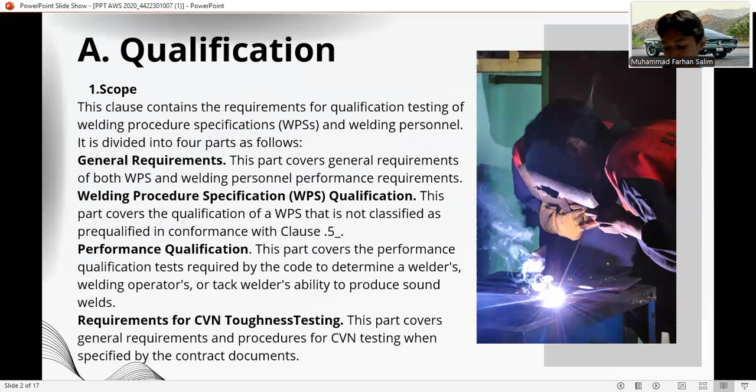And the last is requirements for CVN toughness testing. This part covers the general requirements and procedures for CVN testing when specified by the contract documents. And B is general requirements.

In general requirements, we have one, general: the requirements for qualification testing of WPS and welding personnel, defined as welders, welding operators, and tack welders, are described in this section. In this section, there is one, welding procedure specification or WPS. Except for prequalified WPS conforming to the requirements of clause 5, WPS for use in production welding shall be qualified in conformance with clause Q, part B. Properly documented evidence of previous WPS qualification may be used.

2. Qualification responsibility. Each manufacturer or contractor shall conduct the tests required by this code to qualify the WPS. Properly documented WPS qualified under the provisions of this code by a company that later has a name change due to voluntary action or consolidation with a parent company may utilize the new name on its WPS documents while maintaining the supporting PQR qualification records with the old company name.

3. WPS qualification to other standards. The acceptability of qualification to other standards is the engineer's responsibility, to be exercised based upon either the specific structure or service conditions or both. AWS B2.1 series on standard welding procedure specifications may, in this manner, be accepted for use in this code.

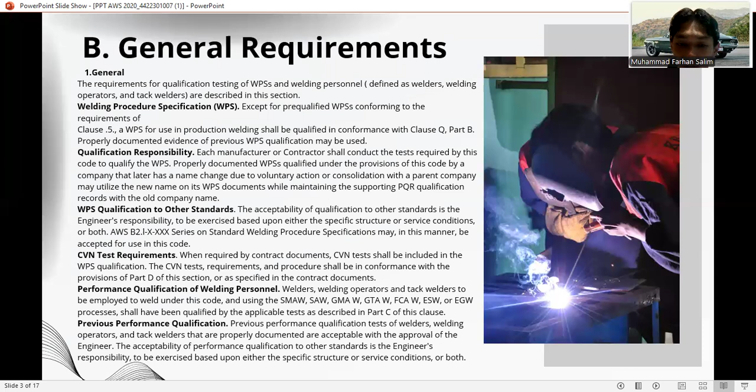And last is performance qualification. Previous performance qualification tests of welders, welding operators, and tack welders that are properly documented are acceptable with the approval of the engineer. The acceptability of performance qualification to other standards is the engineer's responsibility, to be exercised based upon either the specific structure or service conditions or both.

There is two, qualification responsibility. Each manufacturer or contractor shall be responsible for the qualification of welders, welding operators, and tack welders, whether the qualification is conducted by the manufacturer, contractor, or independent testing agency. 2. Common requirements of WPS and welding personnel performance qualification.

There is qualification to earlier editions. Qualifications performed to and having met requirements of earlier editions of AWS D1.1 or AWS D1.0 or AWS D2.0, while those editions were in effect, are valid and may be used. The use of earlier editions shall be prohibited for new qualifications in lieu of the current edition, unless the specific earlier edition is specified in the contract documents.

2 is aging. When allowed by the filler metal specification applicable to weld metal being tested, fully welded qualification test specimens may be aged at 200 F to 220 F, or 95 Celsius to 105 Celsius, for 48 plus or minus 2 hours.

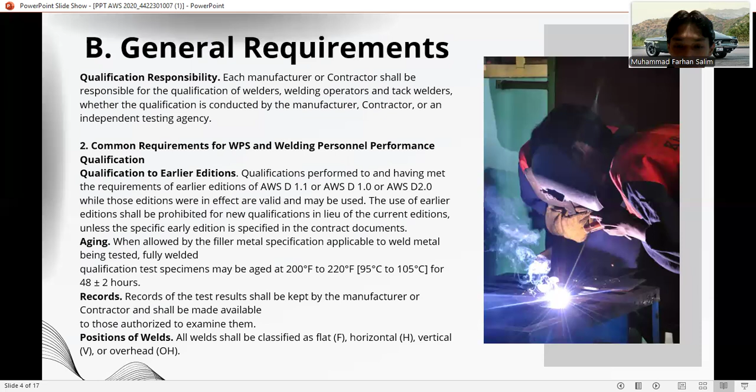There are records: the test results shall be kept by the manufacturer or contractor and shall be made available to those authorized to examine them. And last is position of welds. All welds shall be classified as flat, horizontal, vertical, or overhead.

C. Welding procedure specification or WPS qualification. 1. Production welding position qualified. The production welding position qualified by plate test shall conform to the requirement of clause Q. The type of production welding position qualified by the tubular test shall conform to the requirement of clause 10.

2. Type of qualification test. The type and number of qualification tests required to qualify a WPS for a given thickness, diameter, or both shall conform to CJP, PJP, or fillet. Details on the individual NDT and mechanical test requirements are found in the following subclauses. These are visual inspection, NDT, face, root and side bend, reduced section tension, all weld metal tension, and macroetch.

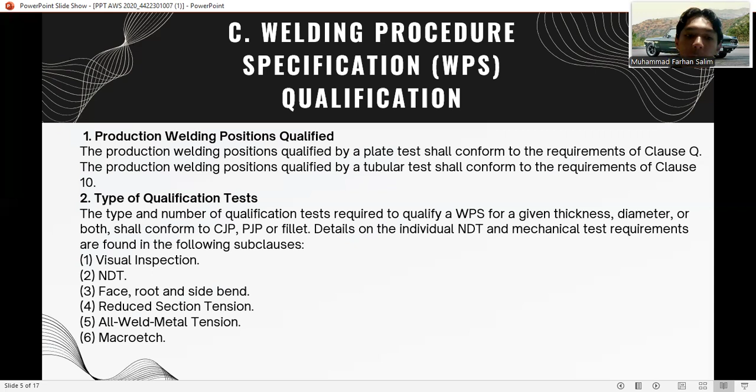3. Weld type for WPS qualification. For the purpose of WPS qualification, weld types shall be classified as follows: CJP groove welds for non-tubular connections, PJP groove welds for non-tubular connections, fillet welds, CJP groove welds for tubular connections, PJP groove welds for tubular T, Y, and K connections and butt joints, and last, plug and slot welds.

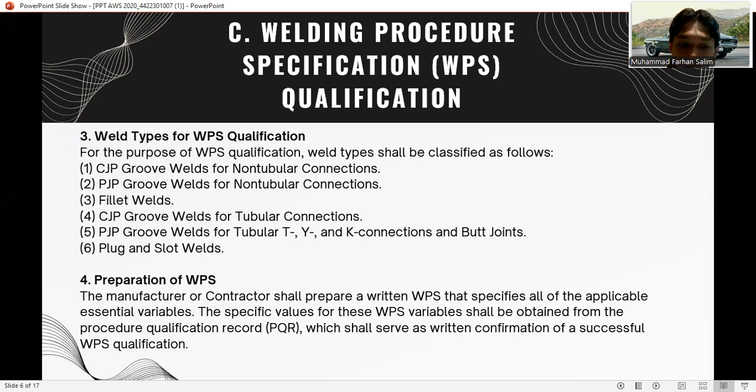4. Preparation of WPS. The manufacturer or contractor shall prepare a written WPS that specifies all of the applicable essential variables. The specific values for these WPS variables shall be obtained from the procedure qualification record or PQR, which shall serve as written confirmation of a successful WPS qualification.

5 is essential variables. A. SMAW, SAW, GMAW, GTAW, and FCAW: changes beyond the limitation of PQR essential variables for the SMAW, SAW, GMAW, GTAW, and FCAW processes when CVN testing is specified shall require requalification of the WPS. B. ESW and EGW. The PQR essential variable changes requiring WPS requalification for the EGW and ESW processes, supplementary essential variables when CVN testing is specified, are shown.

C. Base metal qualification. Procedure qualification testing using base metal shall also qualify WPS using base metal from other groups as specified. WPS for base metal not listed shall be qualified in conformance with clause Q. WPS with steels listed shall also qualify steels in conformance. It also contains recommendations for matching strength filler metal, and minimum preheat and interpass temperature for the materials in the table.

D. Preheat and interpass temperature. The minimum preheat and interpass temperature should be established on the basis of steel composition. Alternatively, recognized methods of prediction or guidelines such as those provided in Annex H or other methods may be used. Preheat and interpass temperatures lower than required or calculated per Annex H may be used provided they are approved by the engineer and qualified by WPS testing.

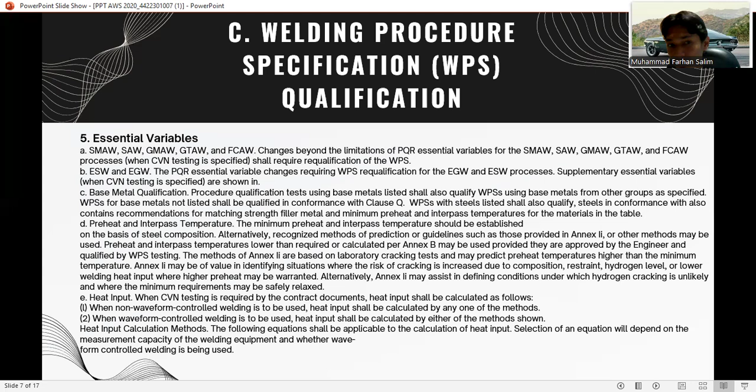Heat input. When CVN testing is required by the contract documents, the heat input shall be calculated as follows. 1. When non-waveform controlled welding is to be used, heat input shall be calculated by any one of the methods. 2. When waveform controlled welding is to be used, heat input shall be calculated by either of the methods shown. Heat input calculation methods. The following equations shall be applicable to the calculation of heat input. Selection of an equation will depend on the measurement capacity of the welding equipment and whether waveform controlled welding is being used.

D. Method of testing and acceptance criteria of WPS qualification. The weld test assemblies shall have test specimens prepared by cutting the test plates through, whichever is applicable. The test specimens shall be prepared for testing in conformance with applicable figures. There is visual inspection of welds. The visual acceptance criteria for qualification of groove and fillet welds, excluding weld tabs, shall conform to the following requirements as applicable.

Visual inspection of groove welds. Groove welds shall meet the following requirements. 1. Any crack shall be unacceptable regardless of size. 2. All craters shall be filled to the full cross section of the weld. 3. Weld reinforcement shall not exceed 1/8 in or 3 millimeters. The weld profile shall conform and shall have complete fusion. 4. Undercut shall not exceed 1/32 in or 1 millimeter.

5. The weld root for CJP grooves shall be inspected and shall not have any incomplete fusion or inadequate joint penetration. For CJP groove welds from one side without backing, root concavity or melt-through shall conform to the following.

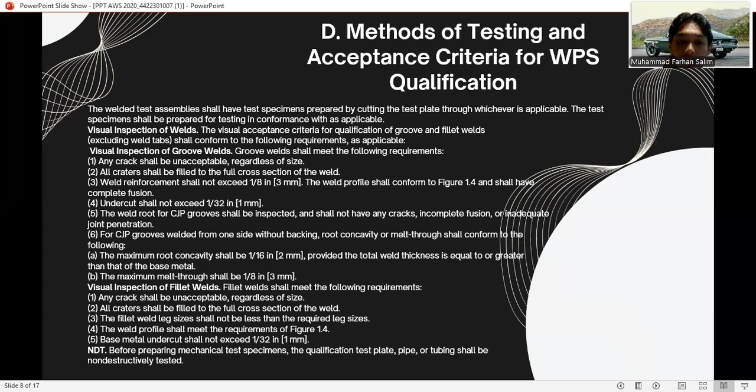And last is NDT. Before preparing mechanical test specimens, the qualification test plate, pipe, or tubing shall be nondestructively tested. There are retests too. If any one test specimen of all those tested fails to meet the test requirements of clause 6.10, the test coupon shall be considered as failed. The retest may be performed on two additional test specimens according to one of the following alternatives. The results of both test specimens shall meet the test requirement.

One, if adequate material from the original weld test coupon exists, the additional test specimens shall be removed as close as practicable to the original test specimen location. Two, if adequate material from the original weld test coupon does not exist, a new test coupon shall be prepared following the original PQR as closely as practicable. The new weld test coupon need only be of sufficient length to provide the required two test specimens. If the new test specimens pass, the essential and supplementary essential variables shall be documented on the PQR.

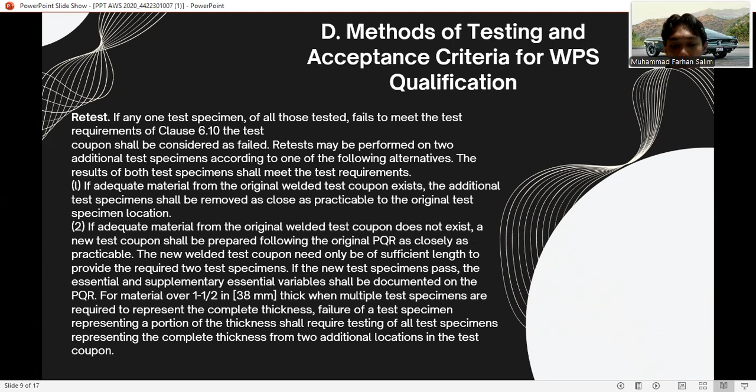E. Welding processes requiring qualification. GTAW, GMAW-S, ESW, and EGW may be used provided the WPSs are qualified in conformance with the requirements of Clause B. WPS requirements for GMAW-S: prior to use, the contractor shall prepare WPSs and qualify each WPS in accordance with the requirements of Clause B. The essential variable limitations for GMAW shall also apply to GMAW-S.

WPS requirements for GTAW: prior to use, the contractor shall prepare a WPS and qualify each WPS in conformance with the requirements of Clause B. And there are WPS requirements for ESW and EGW. One, prior to use, the contractor shall prepare and qualify each ESW or EGW WPS to be used according to the requirements in Clause B.

The WPS shall include the joint details, filler metal types and diameters, amperage, voltage type and polarity, speed of vertical travel if not an automatic function of arc length or deposition rate, oscillation traverse speed, length, and dwell time, type of shielding including flow rates and dew points of gas or type of flux, type of molding shoe, PWHT if used, and other pertinent information.

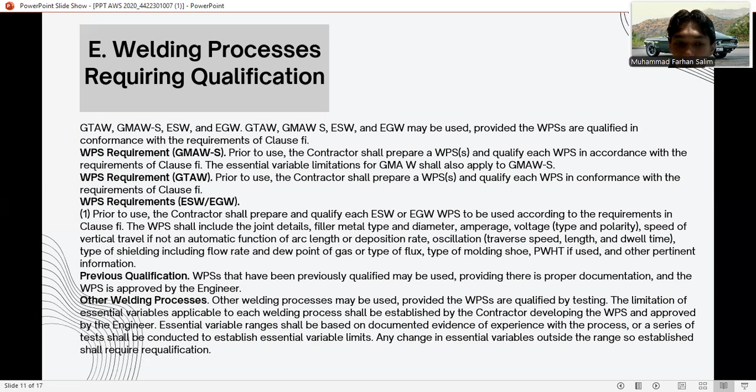Previous qualification: WPSs that have been previously qualified may be used, providing there is proper documentation and the WPS is approved by the engineer. Other welding processes may be used, provided the WPSs are qualified by testing. The limitations of essential variables applicable to each welding process shall be established by the contractor developing the WPS and approved by the engineer. Essential variable ranges shall be based on documented evidence of experience with the process, or a series of tests shall be conducted to establish essential variable limits. Any change in essential variables outside the range so established shall require requalification.

F. Performance qualification. In F, performance qualification, there is the general part. The performance qualification tests required by this code are specifically devised tests to determine a welder's, welding operator's, or tack welder's ability to produce sound welds. The qualification tests are not intended to be used as guides for welding or tack welding during actual construction. The latter shall be performed in conformance with a WPS.

Production welding positions qualified. A. Welders and welding operators: the qualified production welding positions qualified by a plate test for welders and welding operators, and the qualified production welding positions qualified by a tubular test for welders and welding operators. B. Tack welders: a tack welder shall be qualified by one test plate in each position in which the tack welding is to be performed. Production thicknesses and diameters qualified. C. Welders or welding operators.

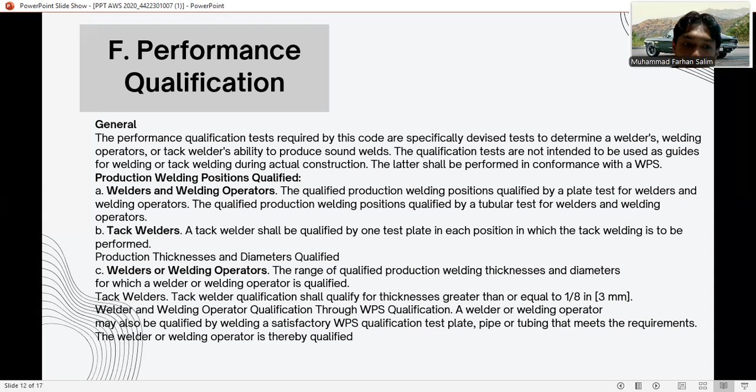The range of qualified production welding thickness and diameters for which welders or welding operators are qualified. Tack welder qualification shall qualify for thickness greater than or equal to 1/8 in [3 mm]. Welder and welding operator qualification through WPS qualification: a welder or welding operator may also be qualified by welding a satisfactory WPS qualification test plate, pipe, or tubing that meets the requirements. The welder or welding operator is thereby qualified.

G. Type of qualification test required. Welders and welding operators: the type and number of qualification tests required for welders or welding operators. Details on the individual NDT and mechanical test requirements are found in the following subclauses. 1. Visual inspection, using WPS requirements. 2. Face, root, and side bends using WPS requirements. 3. Macroetch. And 4. Fillet weld break.

Substitution of RT for guided bend test, except for joints welded by GMAW-S. Radiographic examination of a welder or welding operator qualification test plate or test pipe may be made in lieu of bend test. In lieu of mechanical test or RT of the qualification test assemblies, a welding operator may be qualified by RT of the initial 15 in [380 mm] of a production groove weld. The material thickness range qualified. There are guided bend tests.

Mechanical testing specimens shall be prepared by cutting the test plate, pipe, or tubing for welder qualification or welding operator qualification, whichever is applicable. The specimen shall be approximately rectangular in cross section and be prepared for testing, whichever is applicable. And for tack welders, the tack welder shall make a 1/4 in [6 mm] maximum size tack weld, approximately 2 in [50 mm] long, on the fillet weld break specimen.

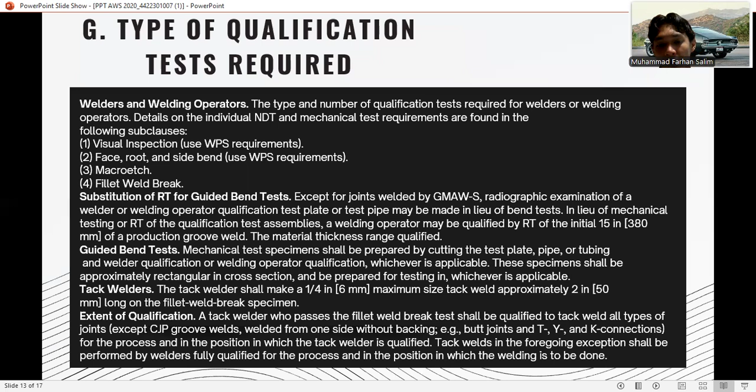H. Weld types for welder and welding operator performance qualification. For the purpose of welder and welding operator qualification, weld types shall be classified as follows: CJP groove welds for non-tubular connections, PJP groove welds for non-tubular connections, fillet welds for non-tubular connections, CJP groove welds for tubular connections, PJP groove welds for tubular connections, fillet welds for tubular connections, and plug and slot welds for tubular and non-tubular connections.

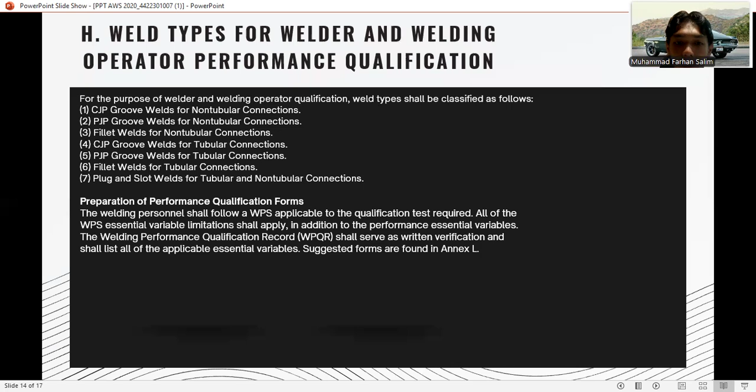Preparation of performance qualification forms. The welding personnel shall follow a WPS applicable to the qualification test required. All of the WPS essential variable limitations shall apply. In addition to the performance essential variables, the welder performance qualification record, or WPQR, shall serve as written verification and shall list all of the applicable essential variables. Suggested forms are found in Annex L.

Method of testing and acceptance criteria for welder and welding operator qualification. 1. Visual inspection. 2. Macroetch test. 3. Plug and fillet weld macroetch test. The face of the macroetch shall be smooth for etching. 1. The plug weld macroetch test shall be cut from the test joint per welder qualification or welding operator qualification. 2. The fillet weld macroetch test shall be cut from the test joint per welder qualification and welding operator qualification.

4. Macroetch test acceptance criteria for qualification. The test specimen, when inspected visually, shall conform to the following requirements. 1. Fillet welds shall have fusion to the root of the joint but not necessarily beyond. 2. Minimum leg size shall meet the specified fillet weld size. 3. Plug welds shall have no cracks, thorough fusion to backing and to sides of the hole, and no visible slag in excess of 1/4 in [6 mm] accumulated length. 5. RT test procedure and technique. 6. RT acceptance criteria. And last is the fillet weld break test.

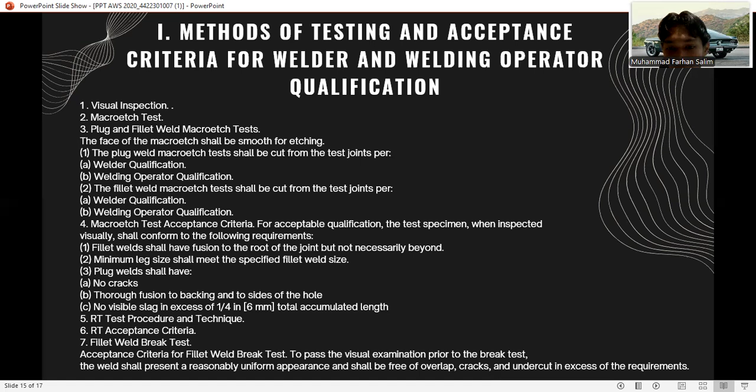Acceptance criteria for fillet weld break test. To pass the visual examination prior to the break test, the weld shall present a reasonably uniform appearance and shall be free of overlap, cracks, and undercut in excess of the requirements.

And then, thank you for watching. That was my presentation about the welder test standard AWS D1.1 2020.